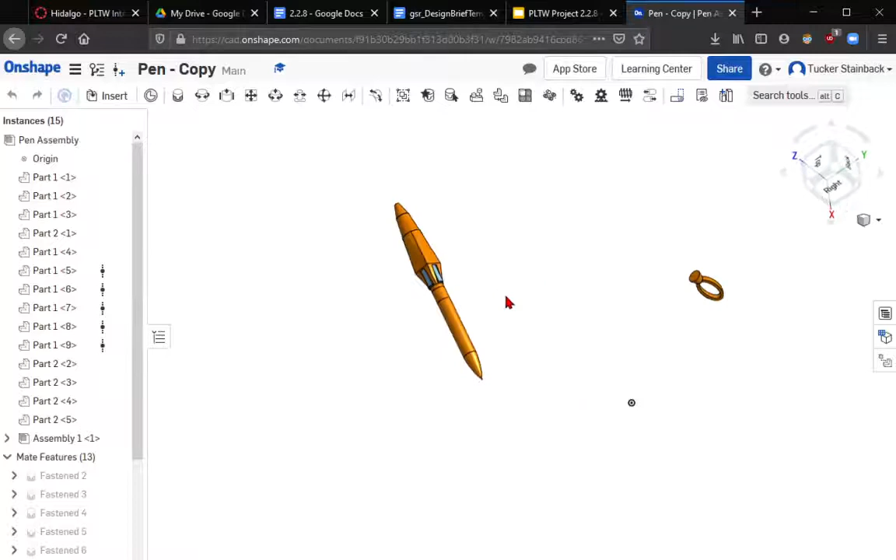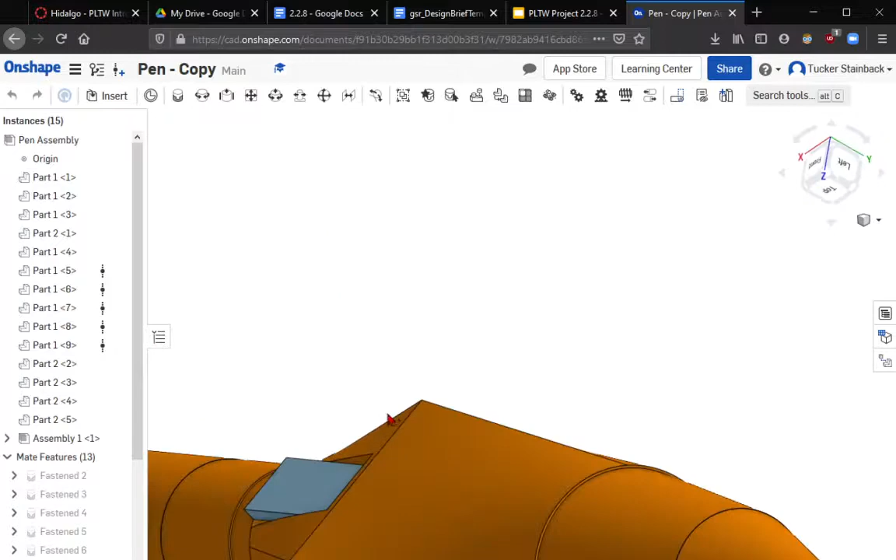So my original idea for the pen accessory was to have it be a grip, but that wasn't really feasible with it being on the top, with one of the requirements being it connect to the top. Now I realize, looking at the discussion page, that I didn't need to do that. But I've already got this modeled and everything, so yeah.

Anyways, let's get to the information, starting with the design brief summary. The goal for the project was a design accessory that would add to the utility of the pen that we had previously created in Lesson 2.2. This came in the form of a pencil accessory that had the following requirements. Criteria. The accessory must attach to the pen with the thread atop the pen. The accessory should have the same or less volume than the pen itself.

The end of the pencil must allow for easy swapping of lead. The pencil should be easily removable from the base of the pen. Constraints. The accessory should be fully designed by 10/29/20. Oh, how I was wrong about that. The accessory should be no larger than 20 cubic inches. The pencil should have a similar tip to the one used in the pen. The accessory should contain no more than 5 parts.

Here is the attached Google Doc that contains most of the information that's not on here. So let's go to that real quick. It's loading.

Alright. So, here's the original answers to the questions that were given to me at the beginning of the design. I actually answered these. This is why I had this Google Doc before I had the presentation. Here's my design brief, right here. It's all filled out, and it basically says the same things that I had said in the design brief summary, or at least most of them.

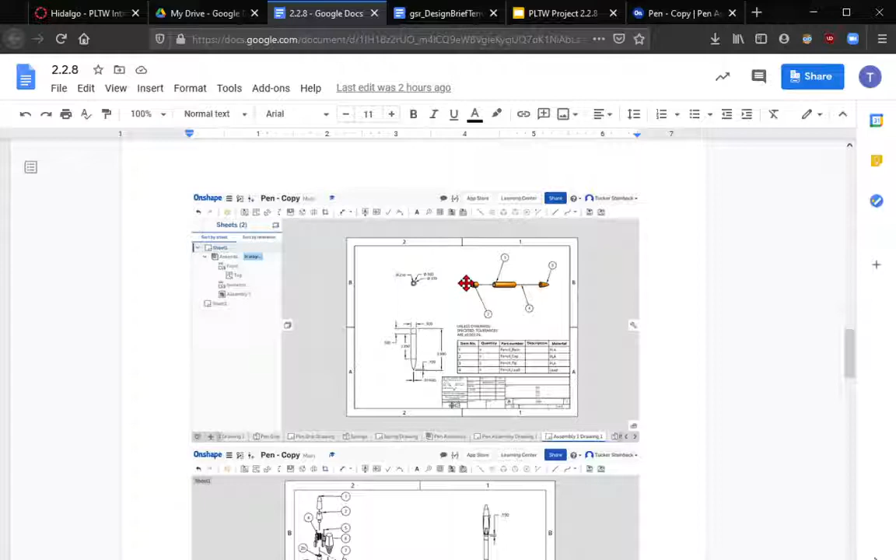Here are the images for the assembly drawings of both the pencil subassembly and the pencil attached to the pen. Now, as you can see, why are there 2 charts here? Well,

Steam, please don't ruin the recording.

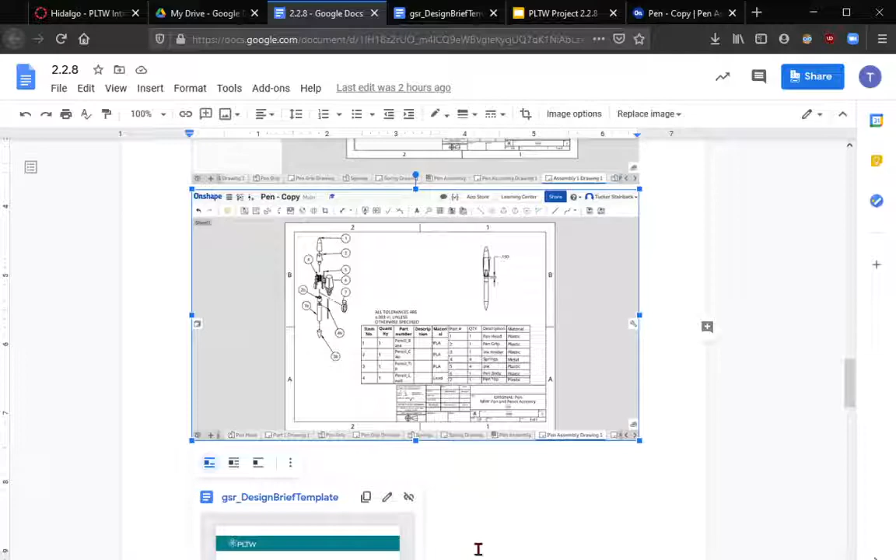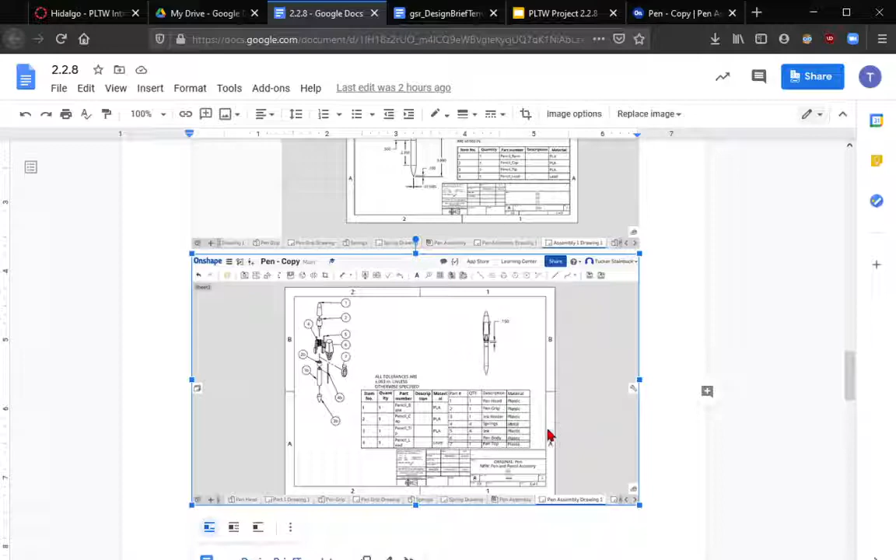Why are there 2 tables here? Well, the original table here was designed by somebody. We had trouble getting the original bill of materials for the assembly in there, so we just had to do a separate table. Kind of weird, but it works. But the subassembly was all done in the assembly itself. Here are some pictures of them by themselves.

The volume of the pencil is roughly 0.484 cubic inches. The volume of the pen assembly is roughly 2.043 inches cubed.

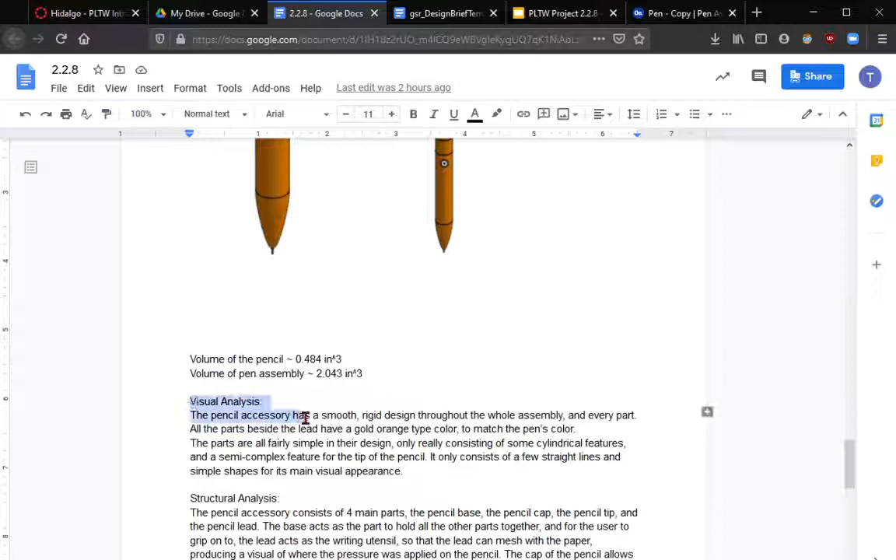Here's the visual analysis. I'm not going to bother to read through it in order not to strain my voice. Same for the structural, but it's all here. Functional, yeah, I could probably do functional.

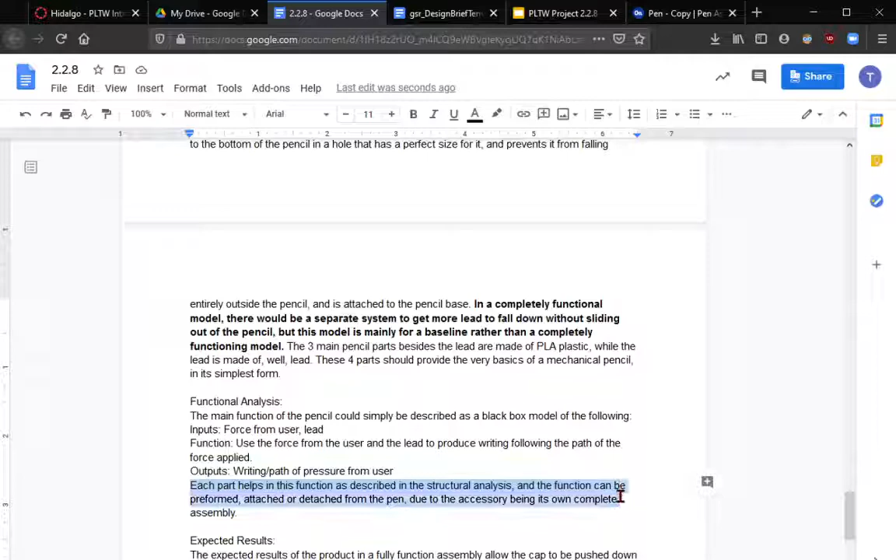Functional analysis. The main function of the pencil could simply be described as a black box model of the following. Inputs: force from the user and the lead. Functions: use the force from the user and the lead to produce writing following the path of the force applied. Outputs: writing/path of pressure from the user. Each part helps in this function as described in the structural analysis and can be performed attached or detached from the pen due to the accessory being its own complete assembly.

Expected results. The expected results of this product in a fully functional assembly allow the cap to be pushed down for more lead to be pushed to the tip of the pencil, so that if the lead breaks, it can easily be replaced using a separate lead pushing system not shown in the 3D model. When pressure is applied, the lead pushes down on the paper, leaving a trail of where the lead touched the paper, and follows the path the lead takes. Okay.

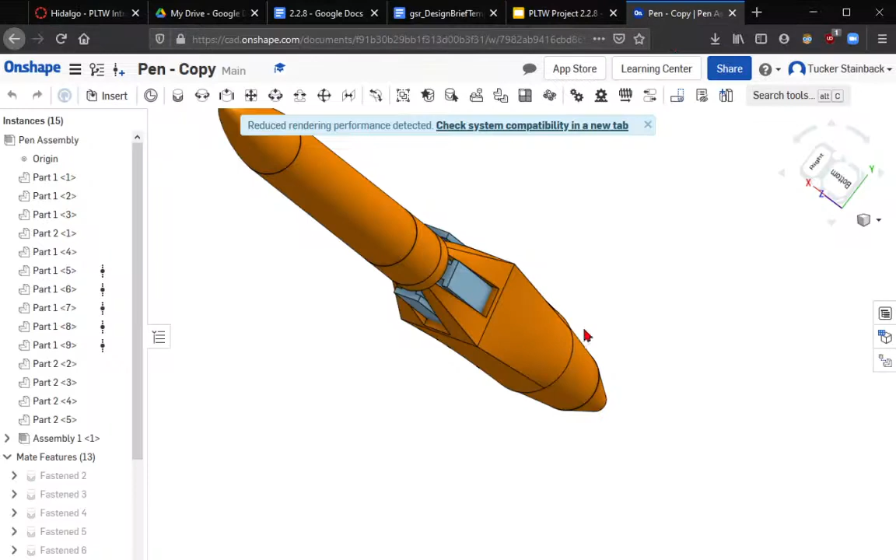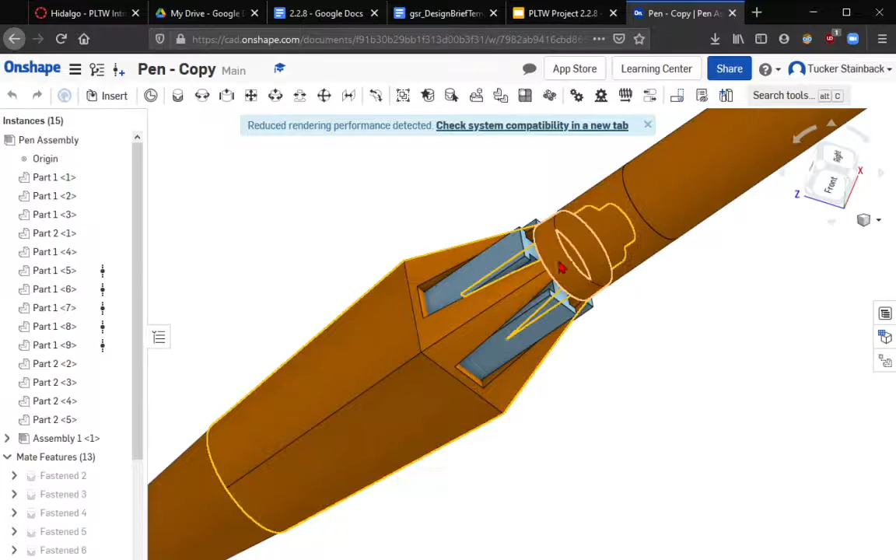So if you wanted to look more at the 3D model, I'm going to show some more views of it. So here is the design for this. You unscrew this off the top, or you just take it off, and then this fits into here. As you can see, there's that little gap there. But instead of just going through the model like some of the other ones shown in the original 3D model, it actually does have a designated hole. If I go to the assemblies,

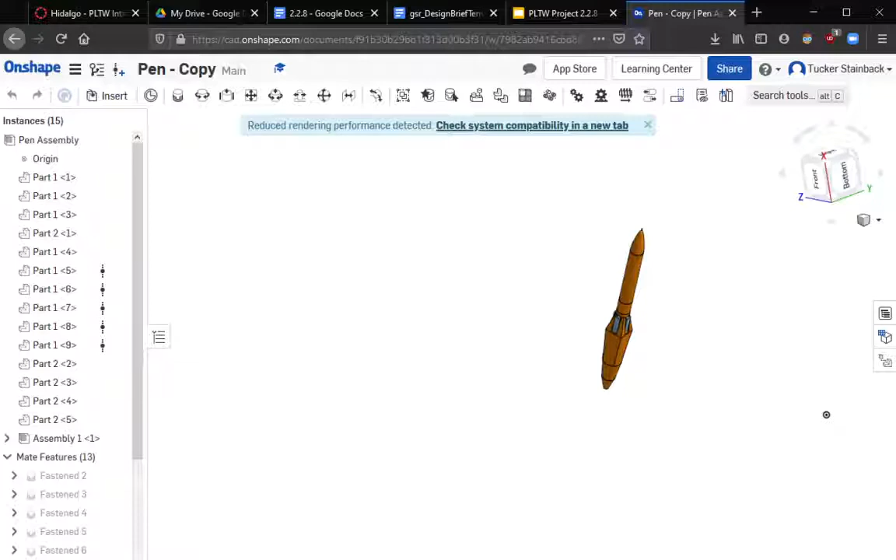come on. My computer's not the greatest. Even though it is a desktop, it still has an i5.

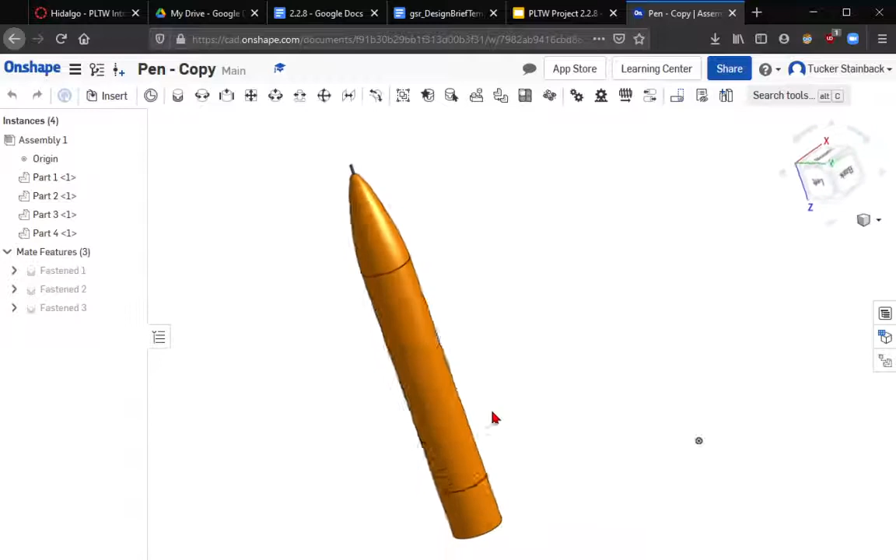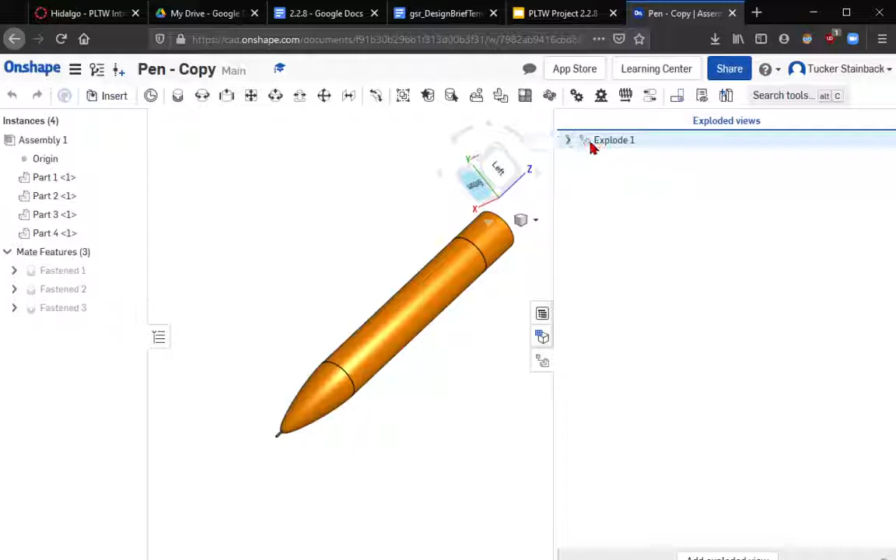Alright, so here you can see that the holes basically are an indent of the top part of the pen. And if I show the exploded view, you can see how this all comes together. Our barrel consists of 4 parts with 3 fastenings, so I think that's kind of neat. Activate explode 1. So here's what it looks like in an exploded view. Here's the lead, here's the tip, here's the base of the pencil, and here's the cap.

Alright, on to the project summary. My goal for this project was to create an accessory for the pen that would increase its usefulness. I feel as though I have accomplished that goal for my project. The pencil is a useful tool as combined with an eraser. You can have a semi-permanent writing utensil compared to the permanent writing utensil of the pen itself. The design meets all the criteria and constraints specified in the original design brief.